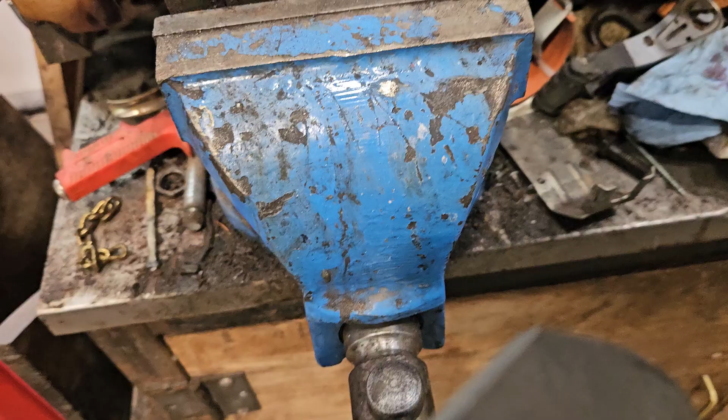Okay, I cut this piece of steel a couple of weeks ago, and then I just didn't have time to continue with that. But today I'm going to work on it a little bit. We'll see how far we get.

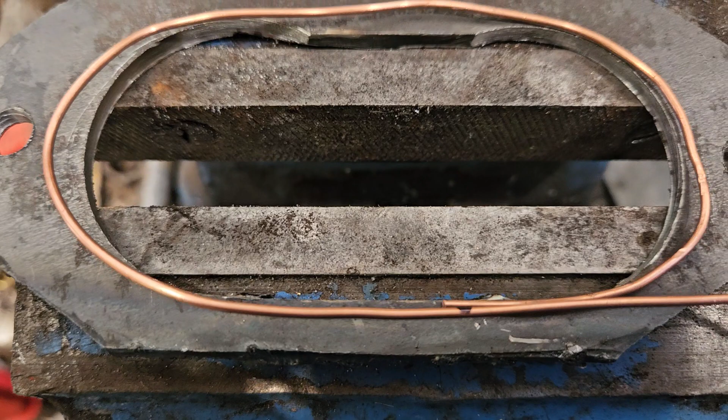I took a piece of copper wire and bent it around to fit there the best I could, and the idea is to straighten this back out and measure it so I got a distance of how much material we need there. So we're looking at about 11 and a quarter, 11 and 3/8. It's pretty rough, but that gives you an idea of what we need here.

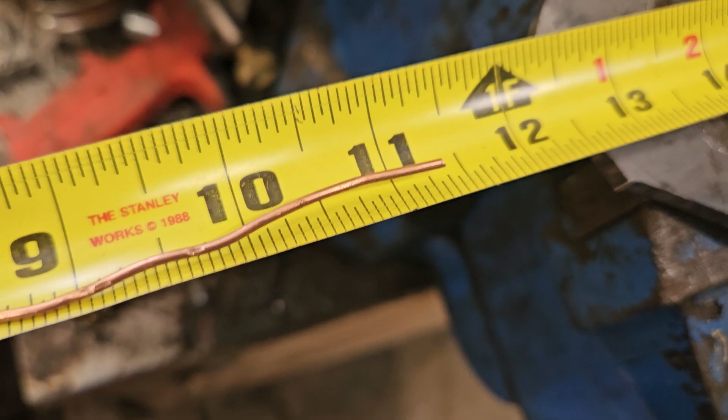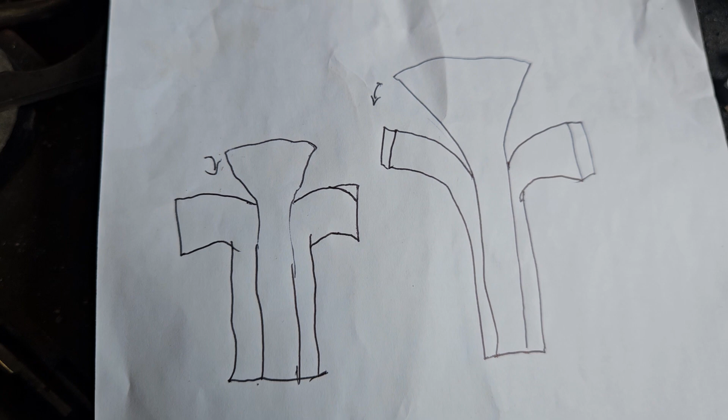This is what I was thinking in my head, but I think more like 4 pieces, not 6. So segments - we're going to eliminate these 2. I'm going to measure, and this total here of all these distances will be 11 and 3/8 or so. And then we're going to use the anvil, and we're just going to hammer it into the shape we want.

Well, first I'm going to cut it out with cardboard. We're not just going to cut metal like that. I got some cardboard there that I'm going to use, and then the steel I'm going to use is right over here. That's the stuff, it's an old oil tank, left over from when I built the evaporator. And then the pipe that I will use will be all welded to this.

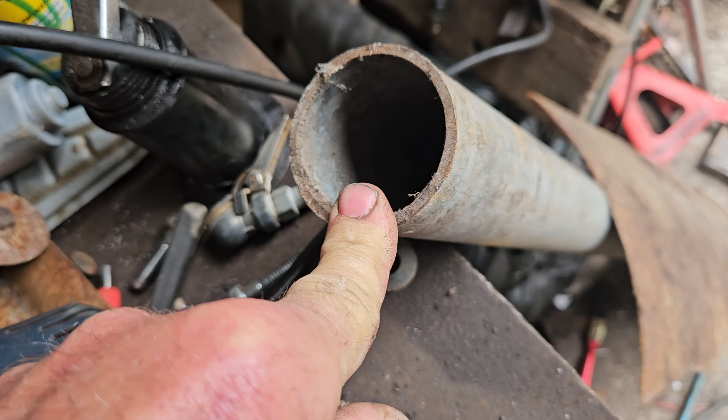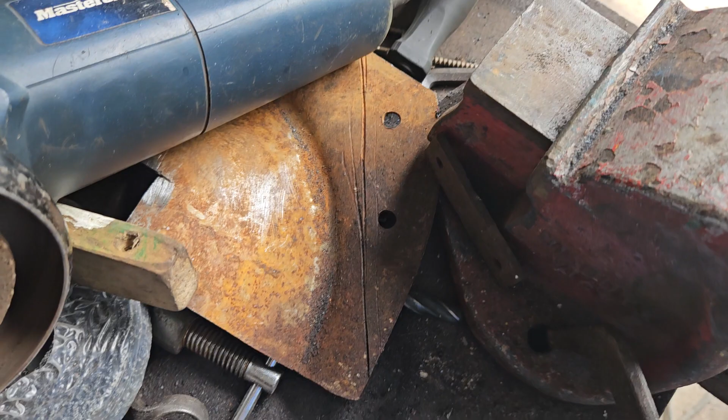So we got to go from this dimension to this. That's about - I didn't measure that, but that's about 2 inch, that pipe, I think. There's some more of that oil tank, I use that quite a bit for different things. Yeah, it's about 2 3/8 OD, and then the ID is, yeah, it's 2 inch ID. I think that'll be fine.

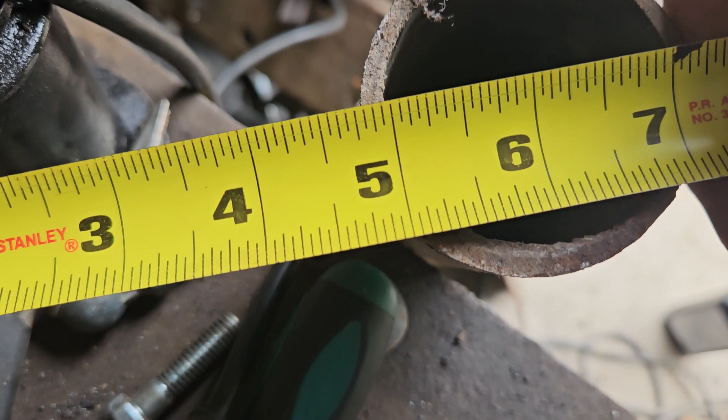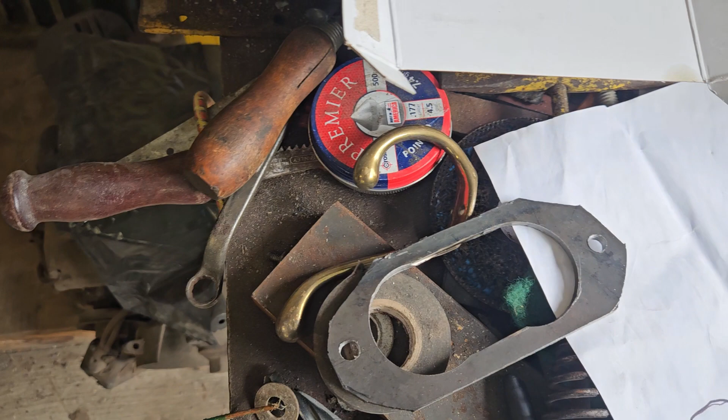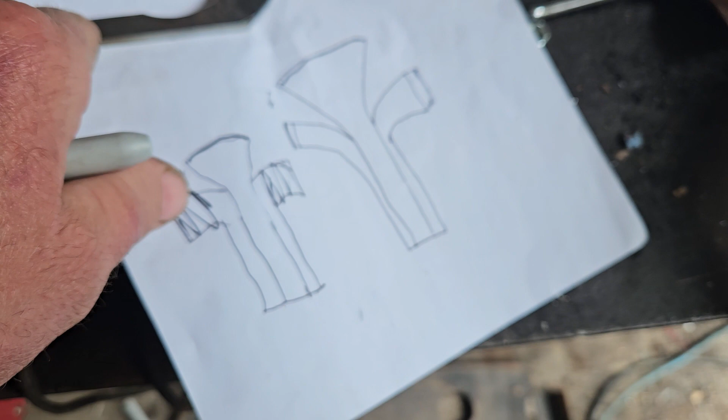It's going to be hooked to a vacuum, just a regular shop vac, and that'll probably pull up most of the dirt, I hope. But then over here, this is a different dimension, so we're going to have a size equivalent to that round pipe over here at these ends, and then this end here will have to match up. So it's pretty easy, you can do it with math, and then you just hammer it and it should form what you want, but we'll see how this goes.

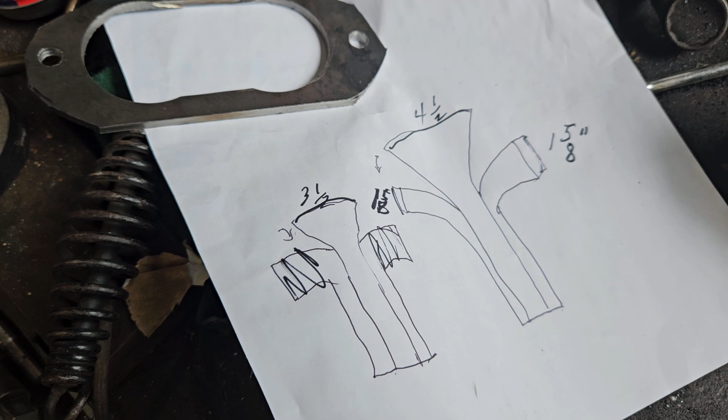Okay, so I come up with some numbers here. It may change, it may not look like this at all, but I think it's going to be something like this. 4.5 here, 3.5 over here, 1 5/8 there. That totals about 11 and a quarter, 11 3/8. But there's going to be welds in these gaps, so you can fill or grind them out and close them, make them smaller a little bit. But this end here has to total the circumference of this round pipe.

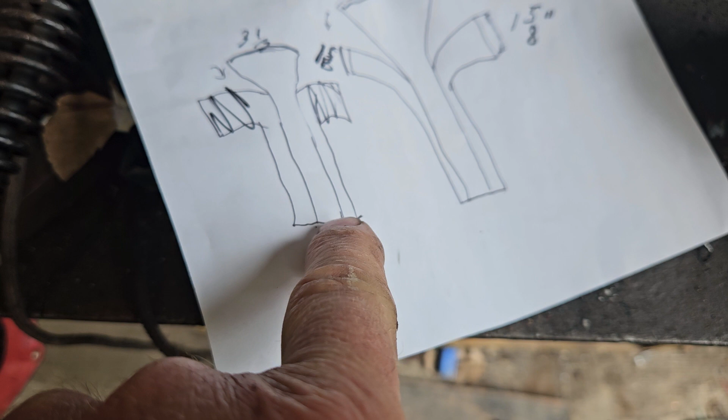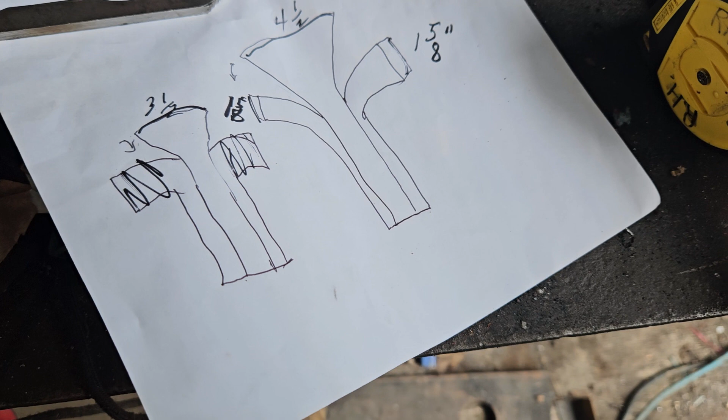So I'll just measure that next, and that's what we need here and here. So these 2 pieces combined, and then we're just gonna start hammering like hell. I might score some cuts with these little thin grinder blades, and then it'll help to bend them. And if it weakens it a little bit, we can just weld it up, weld a couple of them.

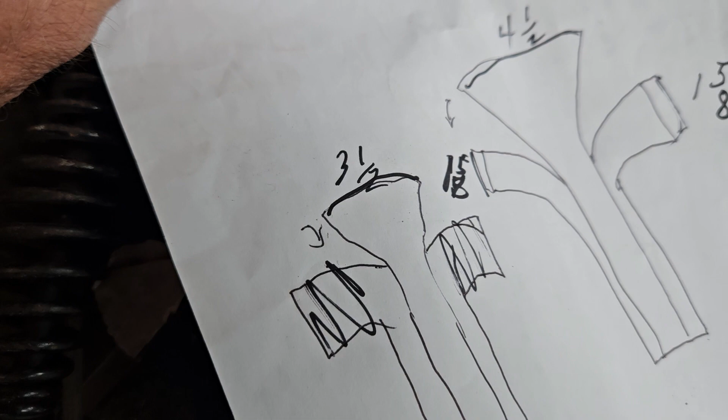I don't know, it won't be very long, I think, in the overall length. Where did I put my marker? We're talking - I'm making it look like it's really long here, like a foot long, but it's not going to be that long. Here's our actual piece here. It'll probably be 4 inches long, maybe 5. So something like this.

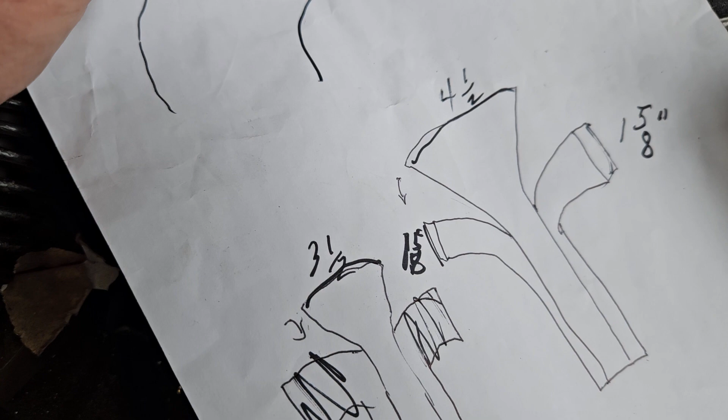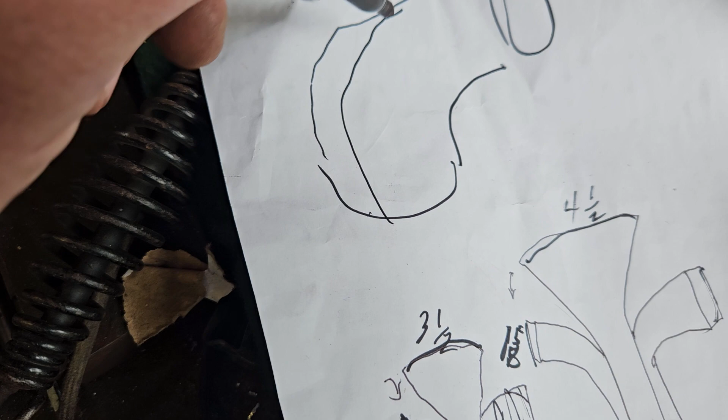And then we're going to go from an oval to a round. Yep, there, keep it in screen. So yeah, and then there'll be a seam somewhere up here. It's all welded together, so a couple of seams.

Let's get going, we'll start cutting cardboard, and we'll see if we can use masking tape and tape it into the shape we want. Okay, well I got a bunch of numbers here - that's 4.5 inches, this narrows down to about 3, and this is 7/8 over here, and it'll flare out to about 1 5/8. Oops, 1 5/8, and over here the same kind of thing.

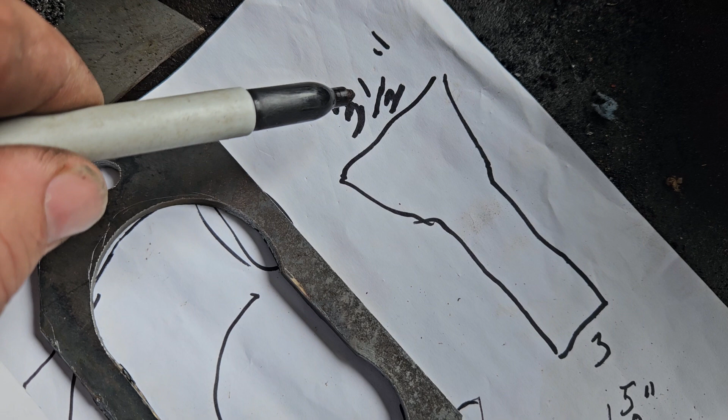But I'm a little worried about this score mark here, we're gonna have to bring this in. I think this is gonna have to come in more, so we should balance all these cuts for bending this round here. So try and bring in frame, should be even - so there should be 3 inches, 7/8, 7/8, and then the other piece is going to be 3.5 inches at one end where it flares out, and then 3 inches at the other end. I may have to make this a little wider.

Anyway, we'll cut this out with cardboard, try it, and if it's really hard to fit together, I'm going to change it before we cut it out of steel for sure. So, I think this score mark is not going to go here, it's probably going to go like here somewhere.

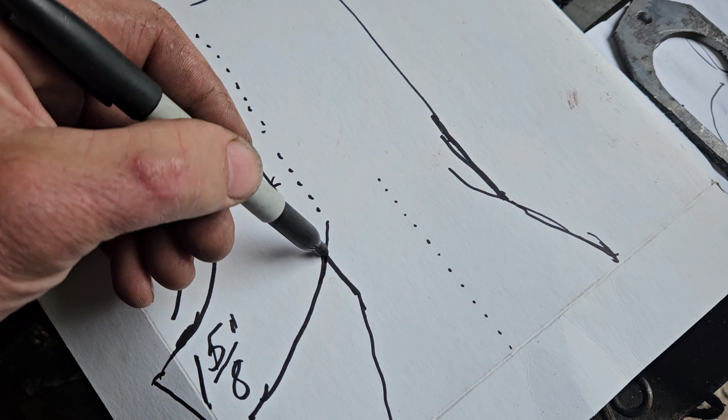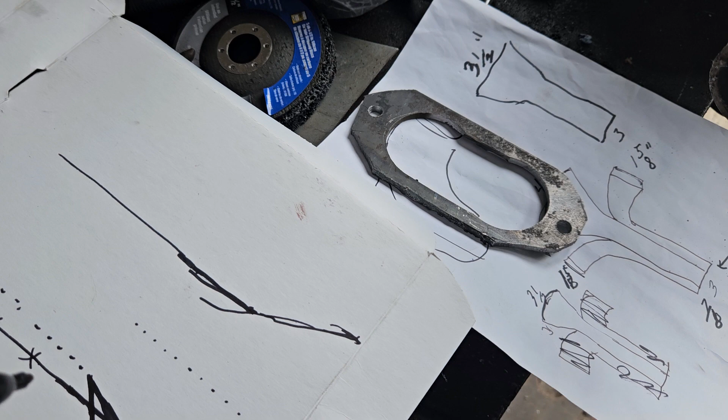I've done this kind of thing before and it worked out pretty good, but get all your dimensions correct at the beginning. It should really go no problem at all. You may have to use the torch to heat this, it's pretty thick, to try and bend this short little piece into a round, but with the anvil I think it'll be a little easier than I think it's going to be, but we'll see.

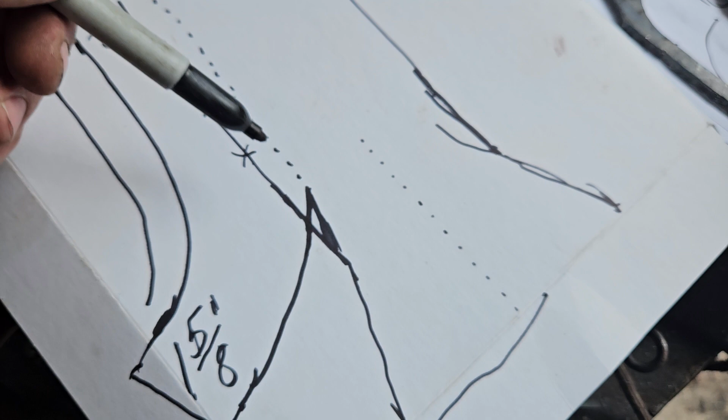Well, let's just give it a try. I'm making it way longer than it needs to be, it doesn't need to be this long from here to here. This is 8 inches, so what we'll end up probably doing is cutting a couple of inches off over here, or if we need it to be that long, that's the way it'll be.

But the profile from the side is going to be like this, so it'll be coming down right like that. I gotta keep you guys in frame.

And what I need is I have a dimension here as well, we need to be... I just measured it. I think it's an inch and... I'm going to have to remeasure that, I forgotten what that number is already. I didn't write it down, so you forget right away. But it's like maybe an inch and a quarter, or inch and 3/8. I'll go check it again.

You can kind of see how the sander sits on there, so there's the lines. The belt fits right in there, and it actually goes around that pipe that's going to continue down through there, and then the bottom of the disc sanders are right here. I think those are the 2 bolt holes for the sander, and then that little plate bolts on underneath there. So I'll go get that plate, there's a little plate that ends up fitting something like that.

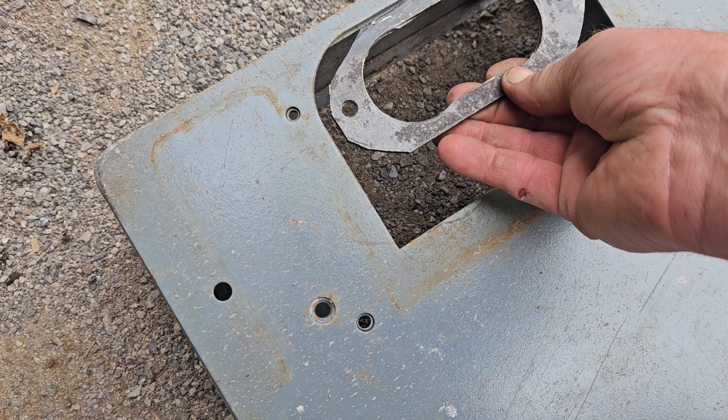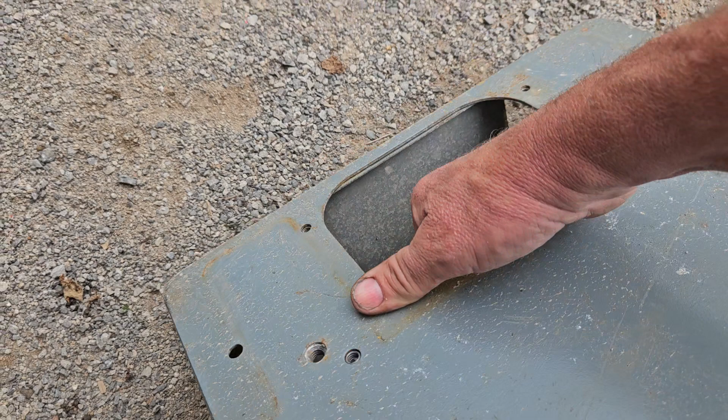I'm not sure, I have to go back up, it might actually fit like this. Anyway, and then we're putting it on that piece of pipe to come out this hole right here. Just have to knock that out, that's kind of like an electrical box, you just punch that out, and then your vacuum hooks right up to that.

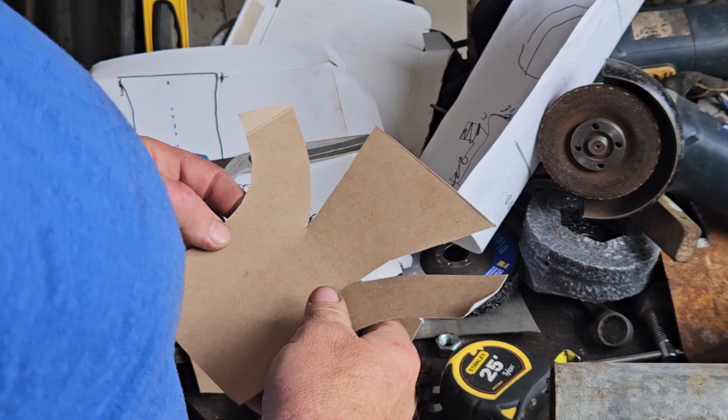Stick that pipe maybe an inch and a half out of this hole. Okay, alright, I got this one cut out, and it's already looking pretty good for shape. Can you guys see? Yeah.

And then we'll just curve this, it's got to fit on top of there, like that. We can always trim, make some adjustments with the grinder, cut a little more or space it a little apart and fill it with weld.

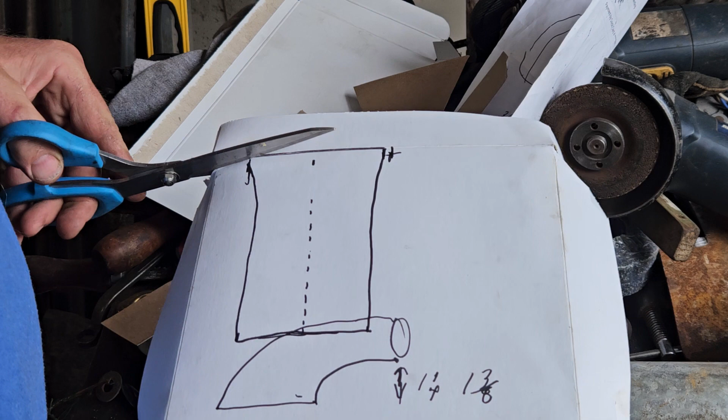Okay, so the other half is this piece, I got marked out here. It's pretty straightforward, this one, it doesn't have to be near as long, so it's a shorter distance, shorter radius, it's this piece in here. So we'll leave it a little long.

I'm going to get some masking tape and we're just going to tape it up. And this should come to approximately that circumference there, that's gonna work, that'd work pretty good. Should just tape it right on there. Yeah, okay, I'm gonna get some masking tape.

Alright, well that's kind of the thing I want, but not near enough height right here, we need to come up. I just rechecked that measurement, it's 1 3/8. 1 1/4 I could handle, but it's just barely even, it's like 3/4 of an inch maybe right now. So we have to add maybe 3/4 of an inch to this piece.

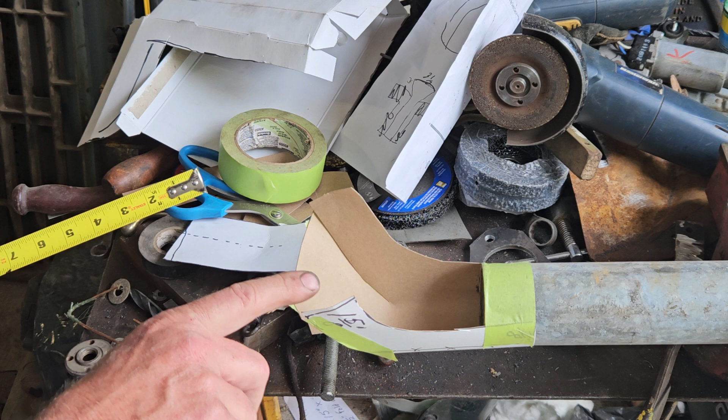These are fine, and then this piece here, it's not going to want to bend the way I want it to bend, so I may have to make some cuts right here and here or something, you know. If I want this to bend like this, there's no way on earth this is ever going to bend upwards, where two bends are going against each other, so we're probably somewhere in here. Make a couple of cuts like that, and then I might have to add a little pie piece.

Actually, I can cut it right now, we'll see what we got here.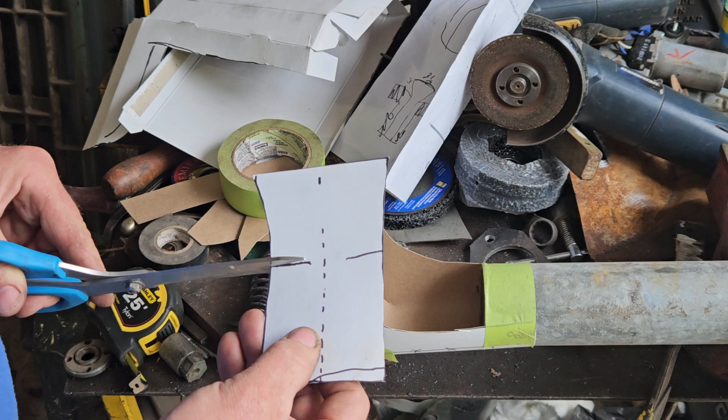Yeah, probably with a bit of heat. Once I weld this here together and over here, weld that together, and we bend this up. Yeah, that's gotta, might have to cut it off here. Add a piece in there maybe. I don't know, it'll be difficult to make that shape. The other side seems to be really easy, but this is that tight radius, and we've got a curve going down here and then a curve going up over here, so it gets more complicated.

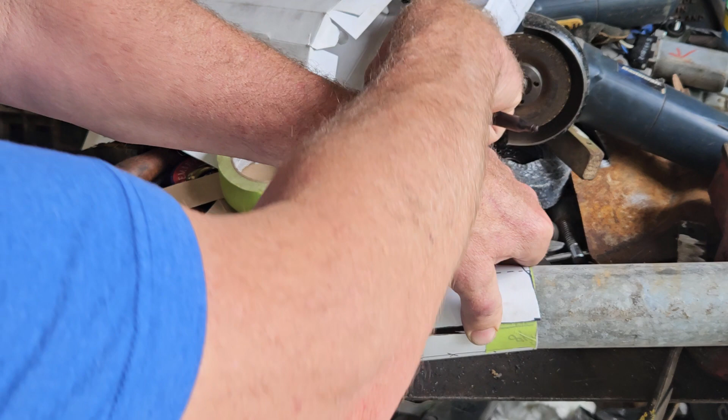But we want to end, I'm just going to butt join it right to this pipe, so this is all extra material wherever it gets nice. On top of all that, that belt has to fit around this, so we can't be too wide here at this point. We're going to have to squish this right down, not very far over, like literally a couple of inches maybe. Maybe I'll go run upstairs and check that sander. That belt is coming right here and here, so if this thing's in the way, if it's rubbing on the belt, it'll just chew the belt right to pieces, so we got to make sure that's in.

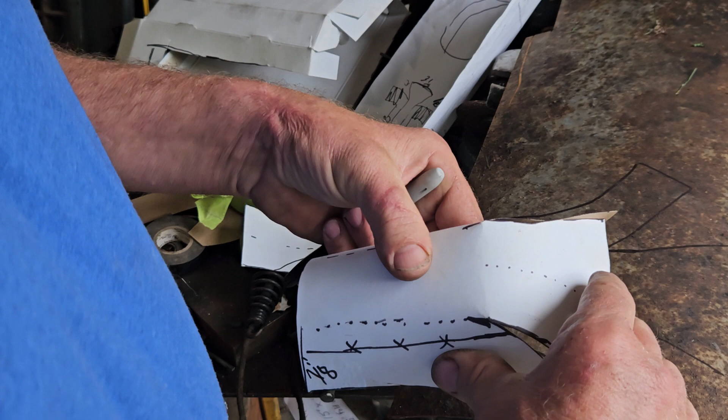Yeah, so we'll cut some metal out. Okay, got it marked out. I've gone in a little deeper right here and here. I think that'll make it a little easier to get it from that curve to the round. And I added about 3/4 of an inch here. So this is going to be the tricky side, is this piece.

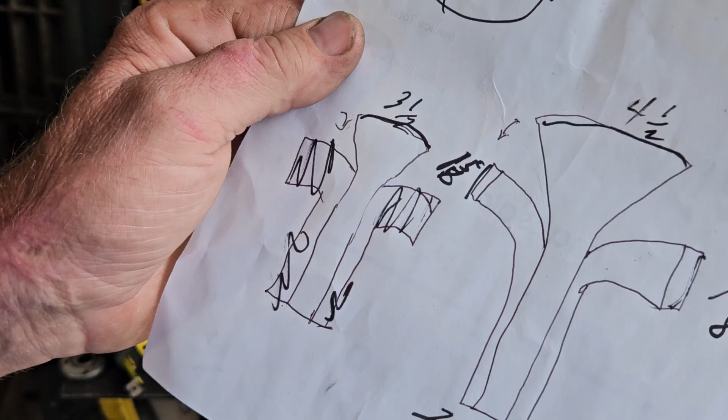Okay, so I'm going to take the grinder and cut that out. Next time you see it, it'll be this shape here out of steel, and then we got to get the anvil and start hammering. So it wasn't that far off with my original drawing, although these two wings over here were just kind of adding a lot of work for nothing.

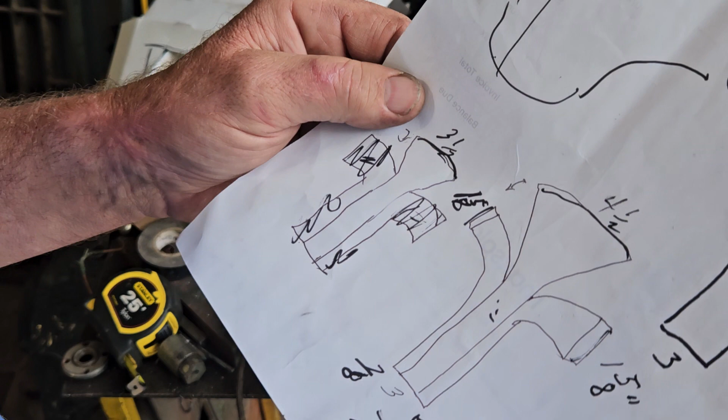So we got the second piece. This is one piece, this is the main piece there. That's the first drawing I made of it, so out of my head, it actually worked out. Now we'll start cutting, no more fooling around. We're gonna cut metal. Okay, I got that roughed out.

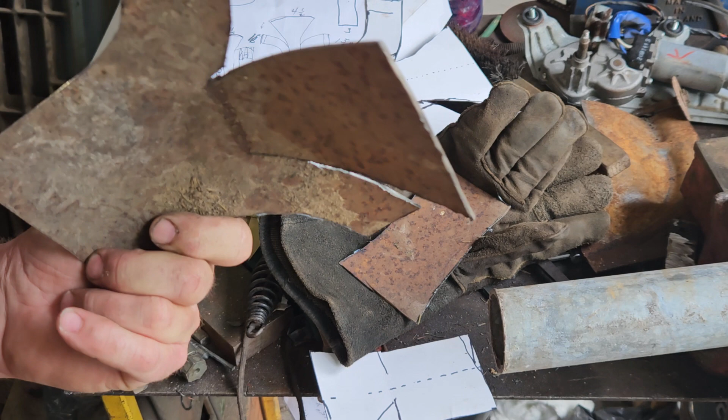I think I can bend that in the vise. I think I got to go a little deeper there, but you get the idea. I'll try and get it a little closer to shape in the vise. Okay, foolishly I believed I could do this with the arc welder, stick welder, and you can't. So I got the MIG out.

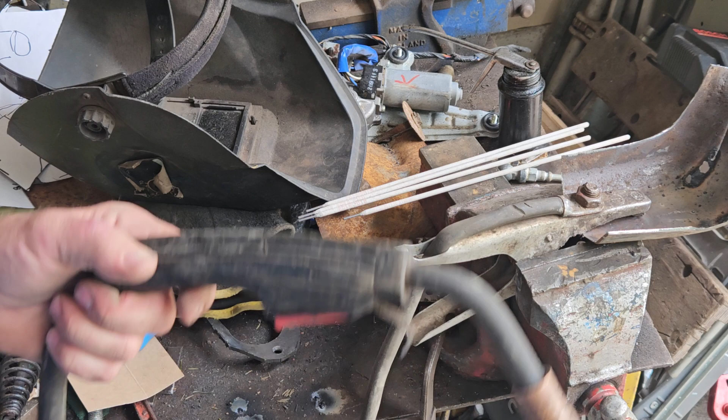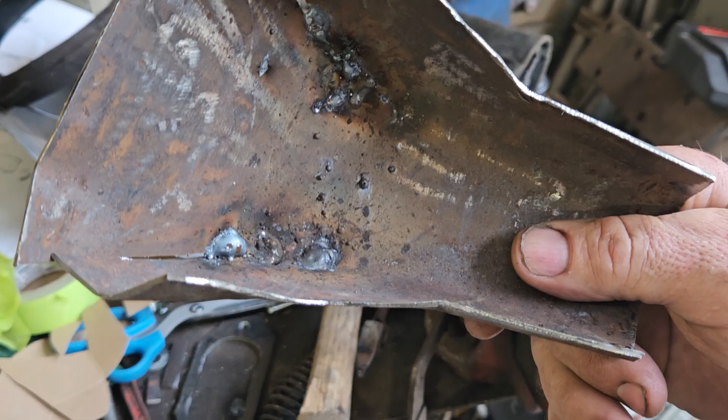It was kind of in behind some stuff, and I thought I'd save myself having to get it out. Forget it, I knew that wasn't going to work. So we're going to use the MIG now. Well, it's coming along, kind of. It's not the right shape in here at all. So we need to bring this.

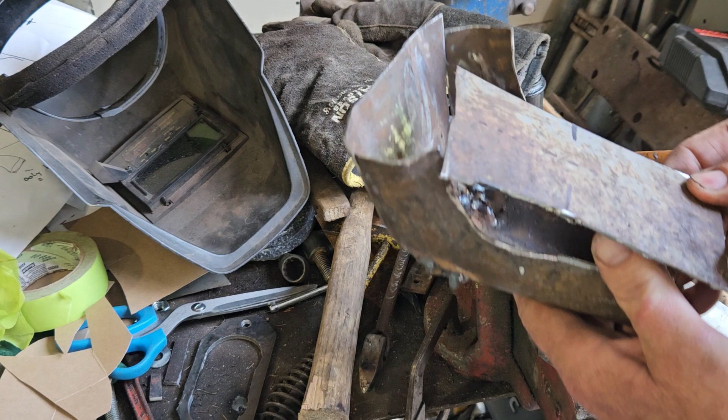I figured it's hot right now still, I've been welding on it. This has got to come closer together because this is nowhere near going to fit, like that. It's just a big gap. So we got to bend this so it's curved up. But I may have to make a new piece like this, but that's okay.

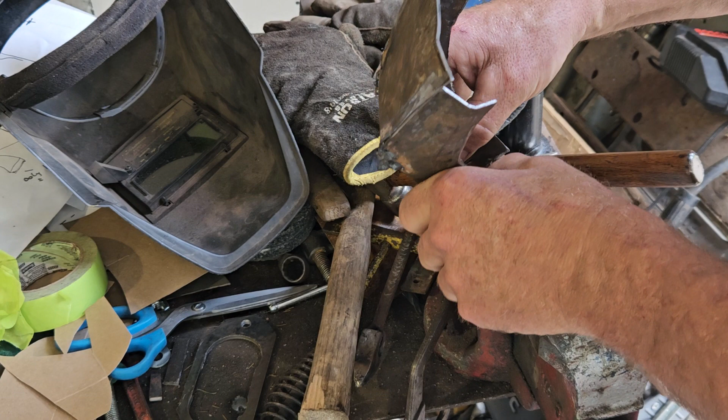We'll use this down here, I'll use this part for sure. I think I will actually. Might use half a piece of pipe, so cut the bottom half of this off. I might do that, yeah, that might be the simplest way to deal with that issue, because you don't need it to be this long. I'll actually cut the whole thing right there.

And then we just need a small piece from here down, curved. It's kind of fitting on here right now. We need to get it a little better shape. Our two bolts have to fit, and it's got to come out kind of square. So if it's off, I may have to ovalize these holes, make them a little bigger, so we can kind of point it in the right direction if it's not coming out the center of that hole. But you get the idea.

And I patched up the blowouts with the arc welder. Yeah, it's not easy to shape this the way I want it, it's pretty small, pretty hard curves. And I'm going to try and squeeze this together. Now I'm going to weld a little more, and then I'll try and squeeze this in. This has got to come in, or maybe make a pie cut right here. Yeah, that's probably what I need to do, make a couple of pie cuts so that it'll bend in and around. Okay, so that's what I'll do. This welder's acting up too.

Sticking in there. Can't stand it when it does that. So, sticks to the tip. Right in there.

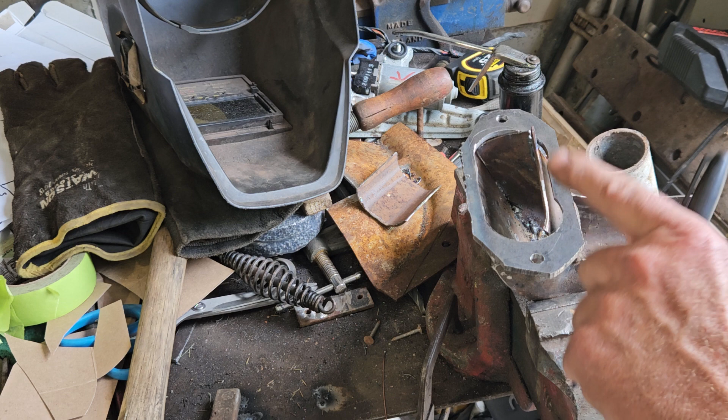I have literally an hour and a half, 2 hours to make this, and then tomorrow I'm on something else. I can't be working on this tomorrow, so it's either do or die. I can always save a little bit for another day, but I want to get this piece welded on, get all my welding done, grind it, wire brush it, and maybe even paint it.

But I think what I'm going to do is weld my piece of pipe on here after it's mounted to the machine, because I have no idea if it's going to come out of the center of that round hole at the other end, and if it's going to clear the belt. I may have an issue with hitting the belt, but I don't think it will. There's a good chance it could be an issue.

So it's better to dry fit it, and it's easy to carry that back up, bolt it back to the bottom, and we'll line up the belt the way it goes, and then we'll have to disassemble it again. It's a real pain to put it together and take it apart.

It's heavy, that thing, but that's part of why this piece on eBay is selling - like the last time I saw it for sale, which was maybe a month and a half, 2 months ago, it was $450 or something like that, US plus shipping. So it's not an option to buy this part, it's either make it or do without.

And I didn't want to make it out of wood. I do plan on using this for metal working, so I don't want sparks flying through a wooden contraption or cardboard or something. So it's got to be steel. So yeah, that's where we're at.

So what I'm going to do is mark this, cut that little bit off there. I just checked the height from the top of this pipe when it's fitted up against here to the top of this. I need about 1 3/4 inches. I've got about 1 3/4 inches, so I think that's going to work.

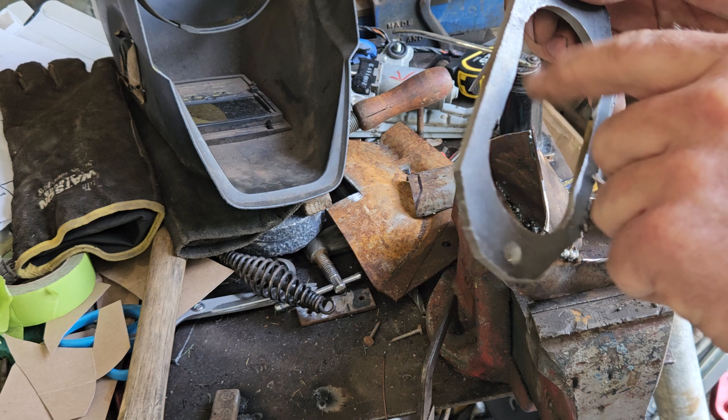This I cut with a 2-hole saw, I think. Well, I cut 2 holes with a hole saw, and then I finished the cut with the grinder. I ground with a cutting disc, and then I drilled the holes to match. The outside I just used the cutting disc to knot around it. Turned out all right, I'll clean it up.

Okay, let's go do that and we'll see how far we get here. I don't know, is that starting to look better? Pretty ugly, but I think once we weld it all up, we'll grind all the welds and give it a little coat of gray paint. It should look better. I cleaned up all the sharp edges on here.

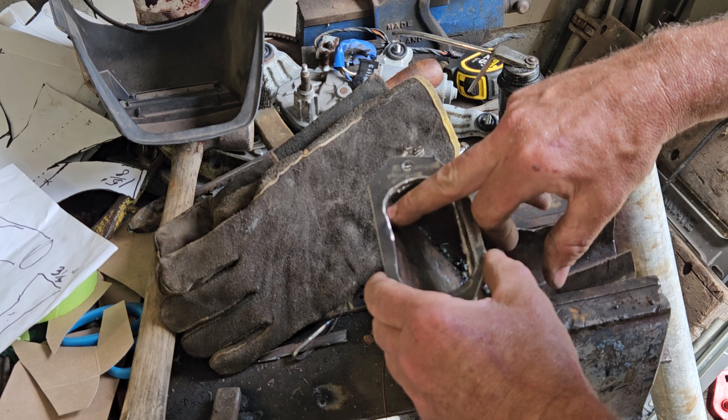The only thing I think I need to take a little more off this corner. It's got a big gap over here, so if I drop that down like that, it seems to fit really close on the back side here. We can fill it with weld. It's not perfect, but let's see. Turn it over. Yeah, that's not bad. It's got a gap there. I might grind that corner there too.

But I think that's the best we're gonna do. We'll hammer that down. A little more curve on the back side. Okay. Yeah, that's better. We gotta grind this and this. So we're getting that profile, we're getting that curve, this is kind of what I was looking for, this shape.

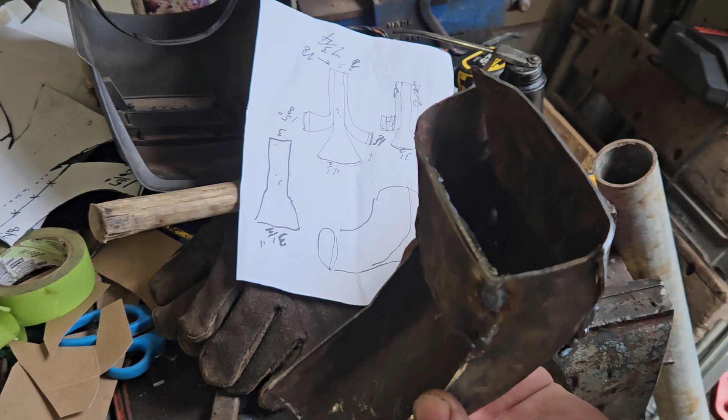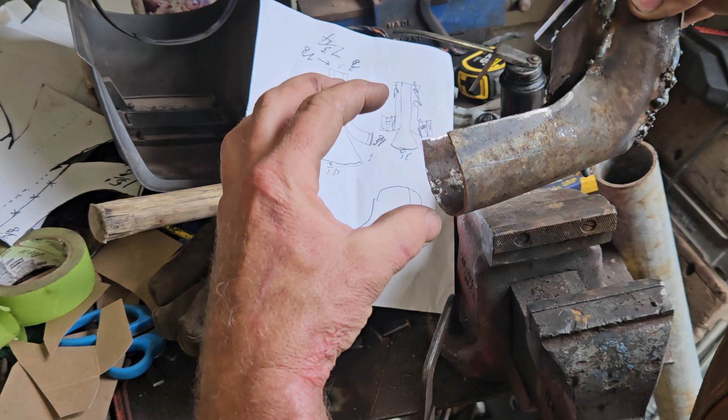And then the flange would be on this. Now the thing is we need 1 3/4 inches, but I could offset the pipe. So from here to the top of the pipe, we need about 1 3/4 inches. I can move that pipe up or down a little bit, I could cheat a little. That's what I might have to do when I fit it together. I'll find out. So we're very close to being finished.

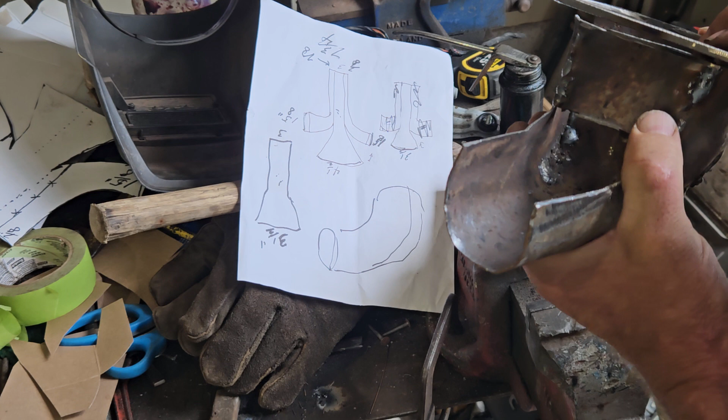I need to get in and clean some of these things up. I think I gotta grind a little more, and then I'm going to tack weld it, and then we'll run upstairs and see how it fits and what it looks like on the machine, on the sander.

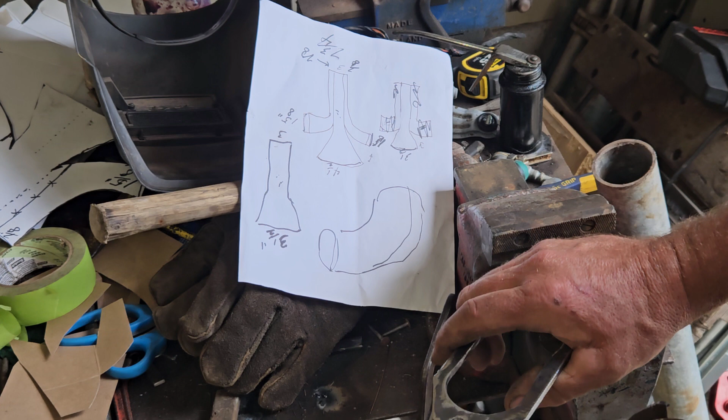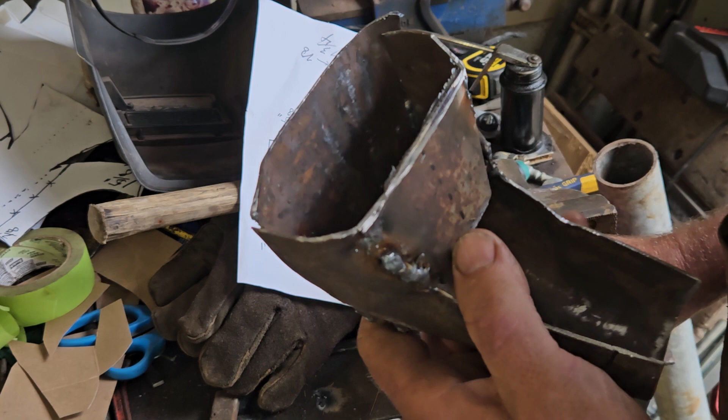This is, if you're just tuning in, we're building a dust collection system for a Delta Milwaukee, a Rockwell Delta. I think it's a 3110, I can't remember the number now, don't ask me the numbers. It's a 6x48 inch belt sander, and this is the piece we're making for the dust collection system for the disc sander, which is an option. I think the part for the belt sander comes with it, but this part here doesn't necessarily come with it, the 12-inch disc. So at the bottom of the 12-inch disc, it gathers into a little opening this size.

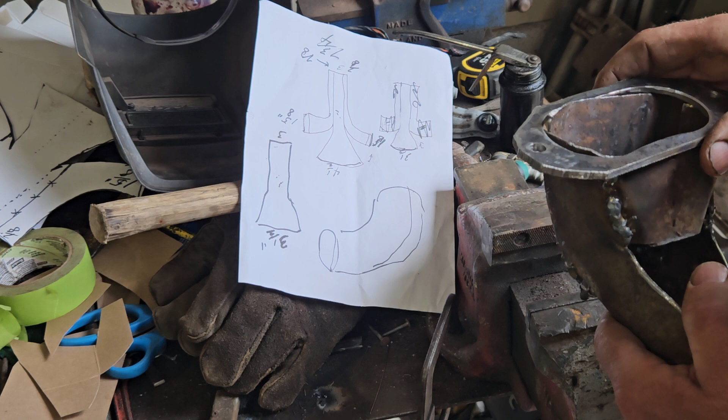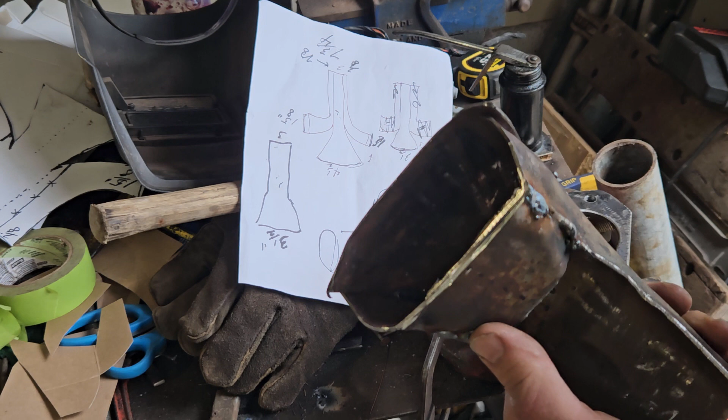I don't mind so much that I didn't get this piece, but the way that tool is designed, all the dust goes right down on the motor and inside the cabinet. It's a terrible design. It should have at least been outside the cabinet, so it lands on the floor and you can clean it up or sweep it up, put a cardboard box down there, or a pail or whatever. But no, it goes right on all your moving parts inside the cabinet, the motor, the belt, the pulleys. So that's why I really would like to have this. It keeps your shop a lot cleaner, and it's healthier for your lungs more than anything.

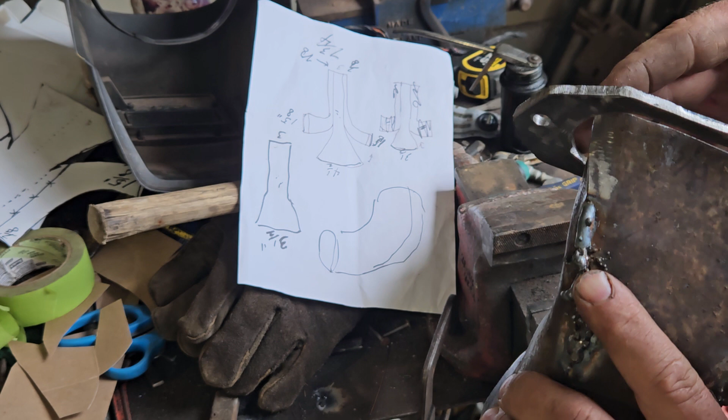So I think I'm gonna go over there. I'll go back and do a little more grinding to fit that a little better. There's too many big gaps right now. And then I'm gonna tack weld it on there, see if I get that down. Look at the big gap right there. So yeah, that's what we're gonna do.

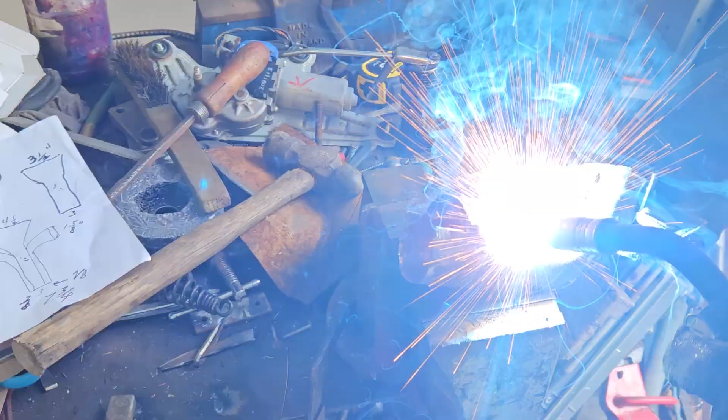Okay, doing the final welding. Big gap to fill right there, boy. I'll try and do it.

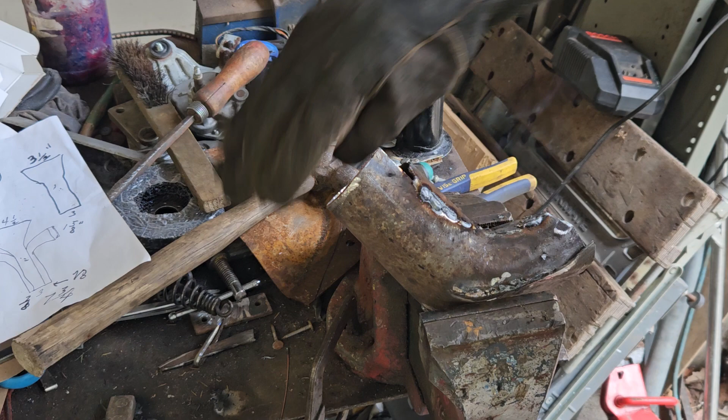Yeah, look at something right there. Ooh, that's getting hot. It's very hot, very hot. Need some vice grips.

We're not going to win any beauty contests today with this thing. It's going to work, it's going to do what I need it to do.